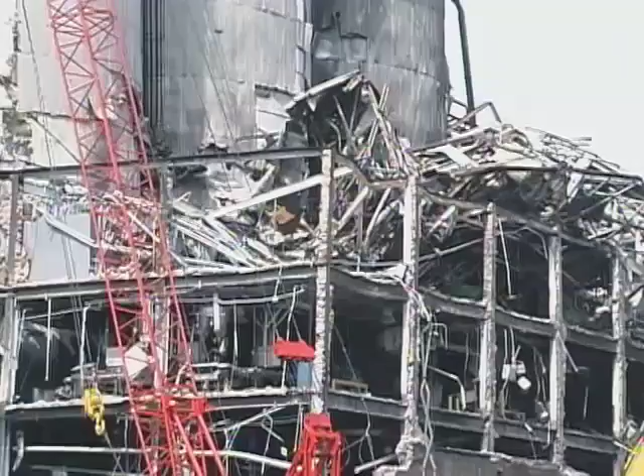Explosions raced through the buildings, fueled by accumulations of combustible sugar dust and sugar that had spilled from equipment. Thick concrete floors heaved up, and brick walls were blown into stairwells and work areas, blocking many exit routes. Fires spread rapidly.

8 workers died at the scene. 6 more died later at a regional burn center. Dozens of others were injured. The plant's massive sugar-packing buildings were a total loss.

The accident at Imperial Sugar was the deadliest industrial dust explosion in the United States in decades. It highlights the extremely serious nature of combustible dust hazards. There were significant accumulations of sugar dust and spilled granulated sugar on surfaces throughout this facility. Conditions were set for a catastrophic accident.

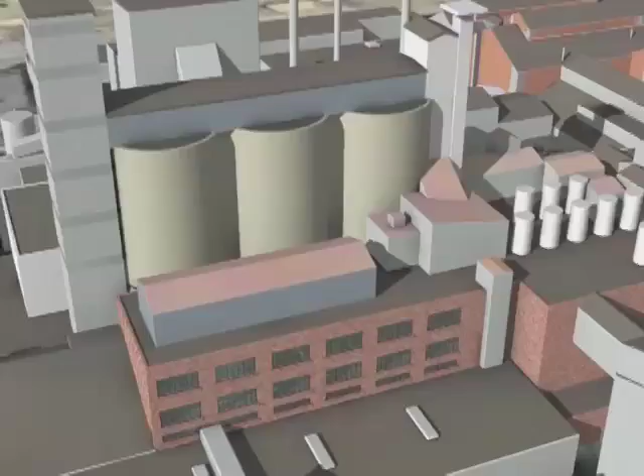Imperial Sugar's sprawling Port Wentworth complex began operations in 1917 and grew to become one of the largest sugar refining and packaging facilities in the U.S. Granulated sugar from the refinery was stored in 3 100-foot-tall silos and then conveyed into packing buildings where it was packaged for distribution. Granulated sugar was also converted into specialty products, such as brown sugar and powdered sugar. Sugar was transported by a complex system of bucket elevators, screw conveyors, and conveyor belts.

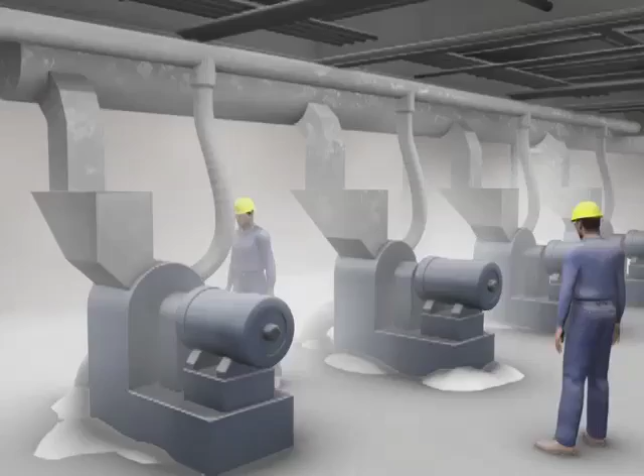During this process, sugar spilled onto floors throughout the work area. In places, the spilled sugar was many inches deep. This sugar also contained fine particles which became airborne. In addition, hammer mills were used to crush the granulated sugar into powdered sugar, creating even more dust.

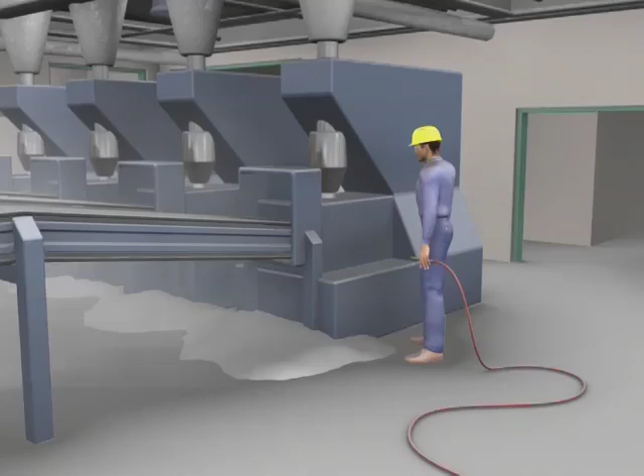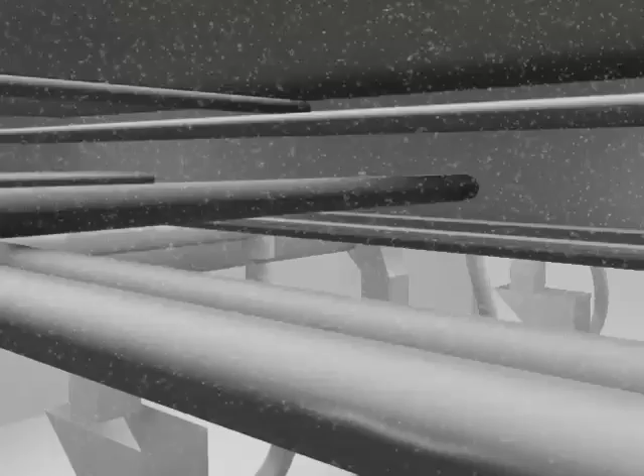The machines were connected to a dust collection system, but it was undersized and in disrepair, and it was not connected to the bucket elevators and conveyors. Significant amounts of sugar dust escaped into the work areas. Workers routinely used compressed air to clean packaging machines, further dispersing sugar dust throughout the buildings. Over time, large amounts of dust accumulated on elevated, hard-to-clean surfaces, such as ducts, beams, and light fixtures. These surfaces were not cleaned often enough to always keep the dust below hazardous levels.

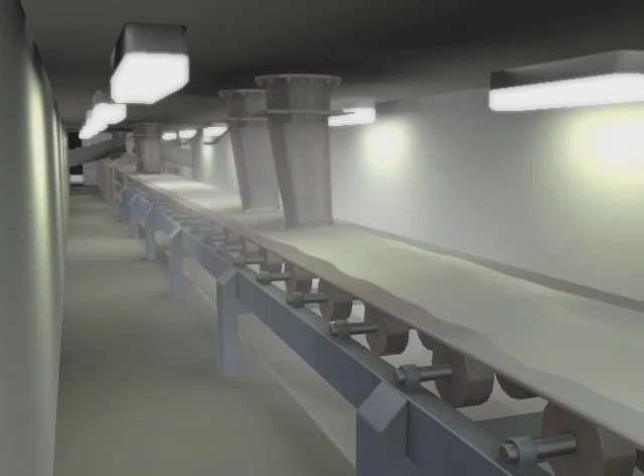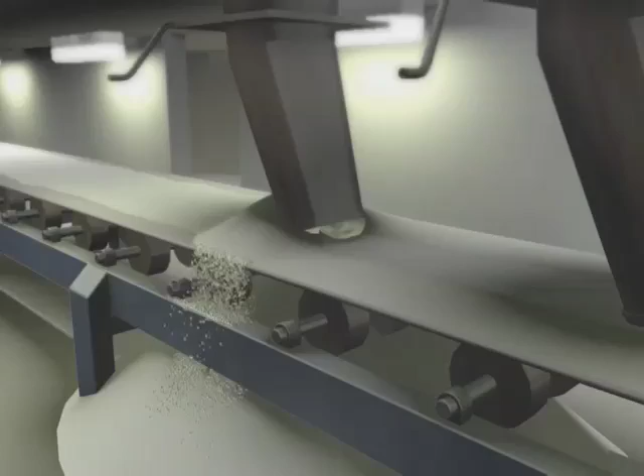In the tunnel beneath the sugar silos, granulated sugar flowed through chutes onto a long steel conveyor belt. From time to time, clumps of sugar would become stuck in one of the chutes, blocking the flow of sugar on the belt, spilling sugar onto the floor and releasing dust into the tunnel. But the tunnel was large and ventilated, so this airborne dust did not build up to explosive concentrations.

However, in 2007, the company enclosed the conveyor belt with stainless steel panels to protect the sugar from possible contamination. The enclosure was not equipped with a dust collection system. As a consequence, sugar dust would now be trapped inside this enclosure.

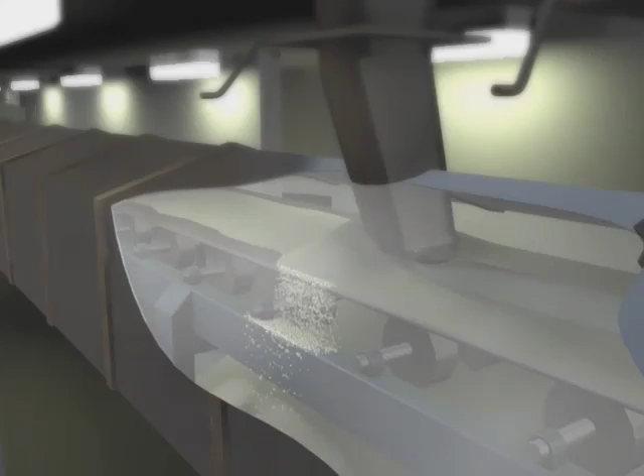On February 7, 2008, clumps of sugar were found blocking one of the discharge chutes. Sugar from the adjacent silo likely spilled off the moving belt. Dust likely accumulated to an explosive concentration inside the enclosure. At about 7:15 p.m., the sugar dust contacted a nearby ignition source, likely an overheated bearing, and exploded.

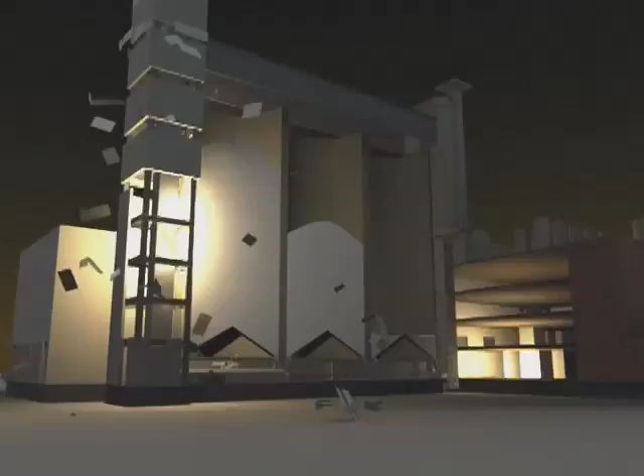This primary explosion blew apart the enclosure and vented into the packing building. Accumulated sugar was lofted and ignited by the advancing fireballs. The dust clouds fueled a chain reaction of secondary explosions, which swept through the buildings. Concrete floors buckled, releasing tons of granulated and powdered sugar into the flames.

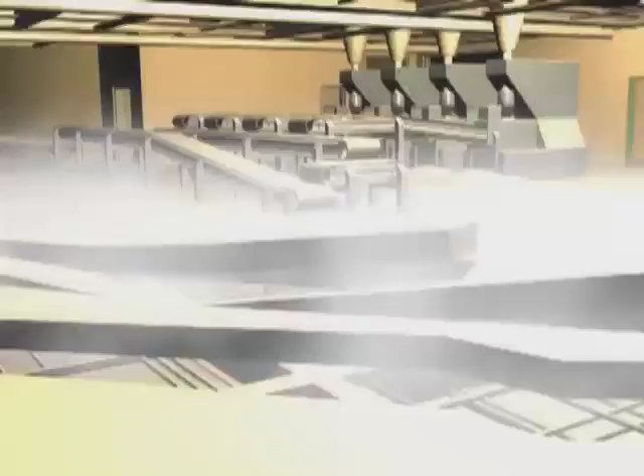Emergency evacuation drills had not been conducted, and the explosions had cut the power to much of the interior lighting. In the maze of darkened and damaged stairwells and passageways, workers desperately tried to flee the growing inferno.

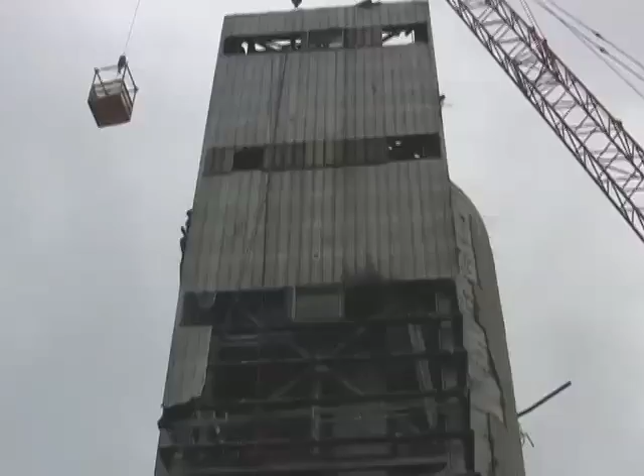The CSB found that correspondence dating back to the late 1950s showed that plant managers in Port Wentworth were aware of the explosive nature of sugar dust and the danger of dust accumulations. As far back as 1961, a memo described a sugar dust explosion that heavily damaged the powdered sugar mill room. Despite the long-standing awareness of the explosive nature of sugar dust, not enough was done to manage the hazard.

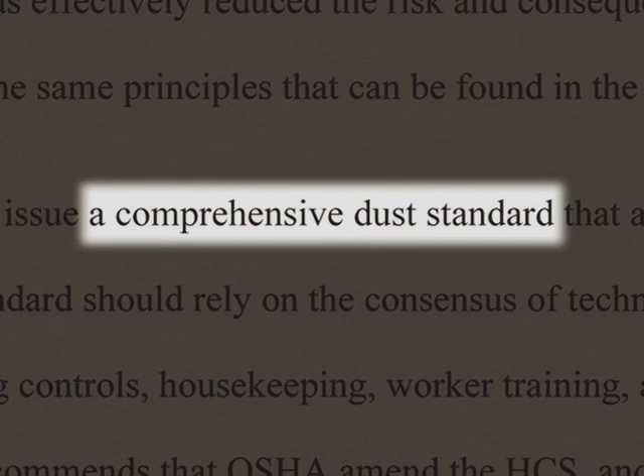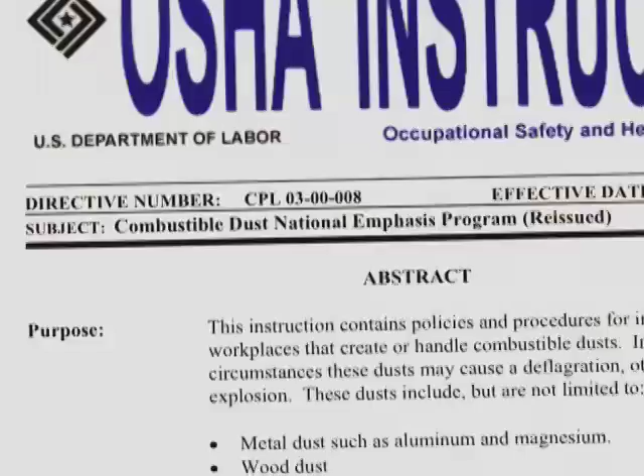In 2006, the CSB issued a study of combustible dust, which called on OSHA to establish a comprehensive combustible dust standard based on the current standards of the National Fire Protection Association, or NFPA. In October 2007, OSHA began implementing a new national emphasis program to increase the enforcement of existing regulations related to combustible dust. Imperial Sugar learned of the OSHA Combustible Dust National Emphasis Program 4 months before the devastating explosion at Port Wentworth. But management did not act effectively to control the serious dust problem in the packing buildings.

Less than 2 months before the disaster, an internal inspection showed that many tons of sugar were still regularly spilling onto the floors. This provided much of the fuel for the massive secondary explosions and fires.

The CSB found that over the years, the Port Wentworth facility periodically experienced small fires fueled by spilled sugar and accumulated dust on equipment. But none resulted in a sugar dust explosion that propagated through the plant. Investigators said that decades of operating without a catastrophic explosion may have lulled managers into complacency.

In its report, the CSB issued the following recommendations to the Imperial Sugar Company: apply NFPA standards to the design and operation of the rebuilt Port Wentworth facility; develop and implement comprehensive combustible dust control, housekeeping, and training programs; and improve emergency evacuation policies and procedures.

Companies can go a long way to control combustible dust within their own facilities by following the existing recommendations of the National Fire Protection Association. But it is also time for a comprehensive federal standard on combustible dust.